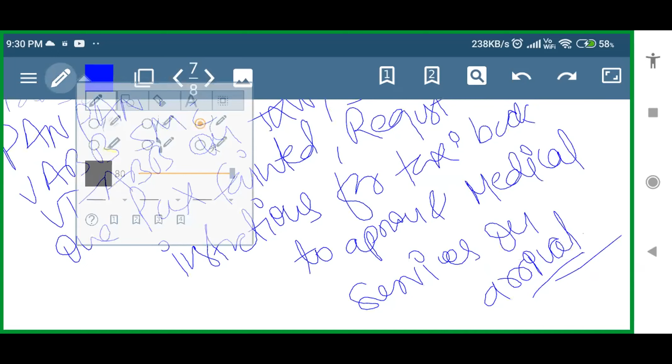Yes, sir. Don't hesitate to end with your call sign. If in a call structure your call is bigger, you will get those situations in our later practices. If your calls are more than 10 or 12 paragraphs, once you have already said your call sign - correction, here is the call sign - even if you repeated it once, you don't need to be shy to repeat your call sign again at the end. This is not a negative marking if you repeat your call sign.

Here also you can say: request instructions to taxi back and medical services on arrival, Bravo.

Don't hesitate that it will be used 2 times. Does not really matter, what difference does it make? If it's used 2 times, so what? So don't hesitate to use the call sign at last. If your lengthy calls make you speak for 1, 2, or 3 minutes, you can end with your call sign anywhere. It happened while I was practicing and learning those things - I also used to think, 'do I really need to repeat the call sign like this?' You can, no problem. I was the person who was feeling shy to repeat that call sign at end. That's why I thought I should tell you - no problem to repeat the call sign at end.

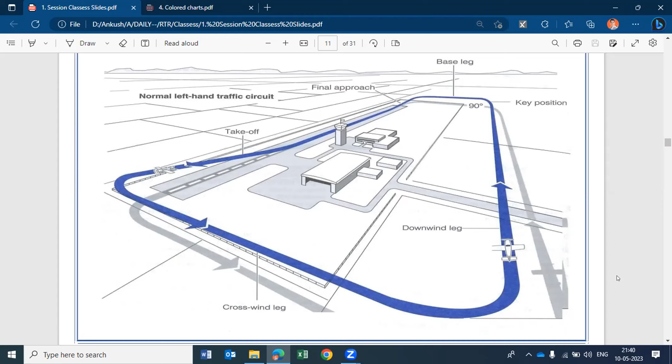Okay, like omission of 'go ahead' is also a similar kind of part. To make the call more professional, they had omitted 'go ahead', so that nobody will order you to go ahead. If someone is saying his call sign last, it means he has completed, now you can go ahead. Such kind of terminology, these are simple literature, philosophy things. So instead of air traffic controller, air traffic services is now in broad use in documents.

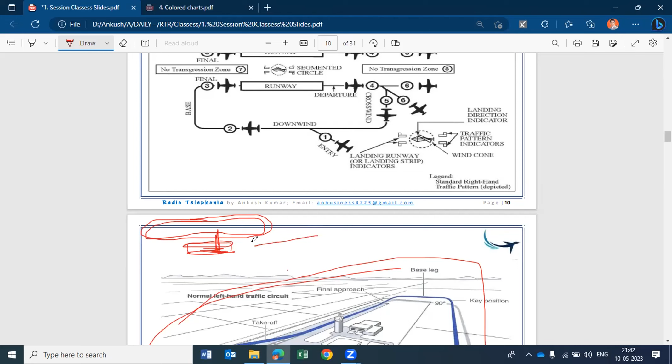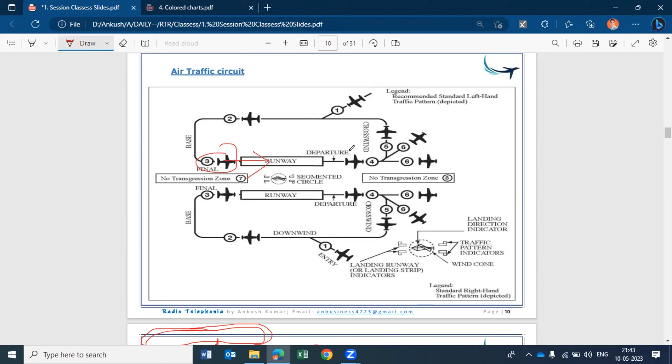I'll tell the definition of it at the end. First understand it with examples and figures. Air traffic circuit means an enclosed area or envelope over an airport to regulate or moderate its traffic. Suppose one aircraft came, two aircraft came - here only you can see this is the actual runway he needs. Suppose in this center only, here is our runway where the aircraft has to land. So many aircraft came at once, they will be told to go and circle around, like this. So they will make an envelope, an area just above the aerodrome so that they can.

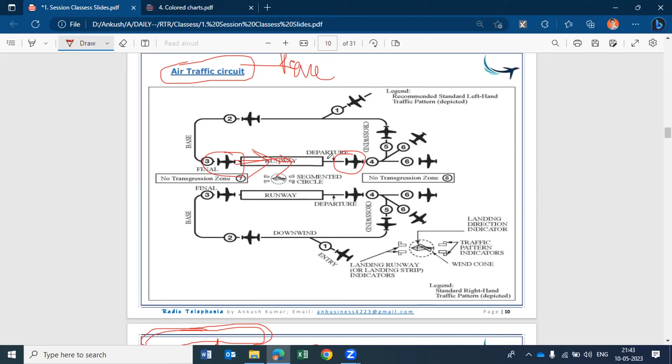Regulate only one aircraft to land on the runway and the rest of the aircraft will revolve around this circuit. This circuit means the closed envelope or closed loop. This is the circuit. Whose circuit is this? It's the air traffic circuit. What will it do? It will reduce the load of air traffic services. All aircraft cannot land at once, so they'll allow one aircraft at a time. The rest will be told to circle around the airport. Okay?

First use of the air traffic circuit, second use whenever you are following a VOR. It doesn't mean that they are going to align you with reference to a runway only, or that following a route means you'll directly land on that runway. For example, suppose you are following route Golf 450 and going to land directly at the runway, then what about these other routes?

Will aircraft take off using only this width? No, right? Yes or no? Let's make this session interactive. No sir, very good.

So if this route is such and my runway is this one, if I follow Golf 450 I will land on the runway. But what if I don't follow Golf 450? Do I have no right to land on the runway? Our runway is like this, if I follow Golf 450 I will directly land on the runway.

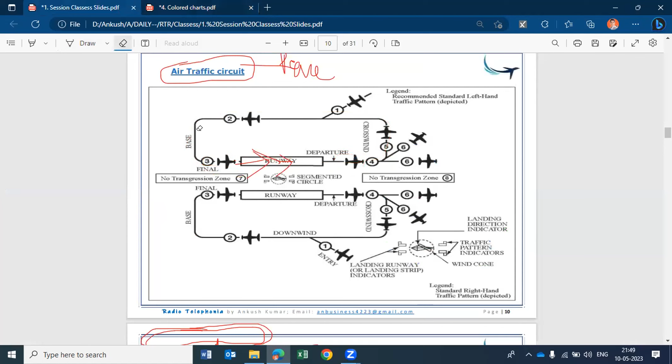Yes sir, now you can draw this figure. Shall I draw it roughly so it's easier for you? Do you want me to draw this with my hand on screen, or is this diagram good enough to understand? Yes sir, it is fine. Very good.

Sometimes students are like this, if they don't draw it themselves they won't understand. I had practiced drawing it myself, but this figure I had taken from Google. I don't know if there is a copyright issue or not. No, no copyright issue, okay.

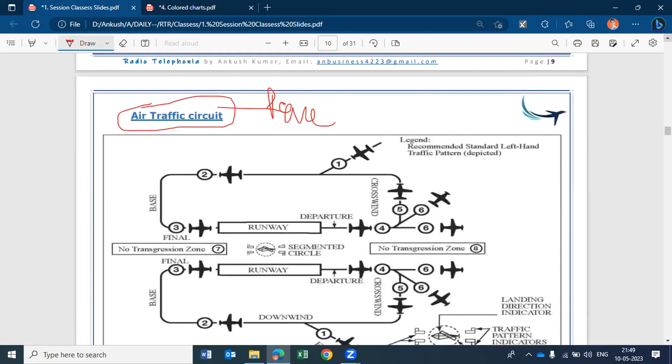So this is the actual traffic circuit, you understand how it is? This is above the ground, above the airport only. If you wish to see, this is the traffic circuit. See, there is some height, right? Not exactly on the ground, this is at some height. Is it clear? This blue colored line, this is an example of an air traffic circuit. Got it?

Yes sir, if the aircraft will come at here. For landing we need a final approach, it is written here right? Is this figure visible?

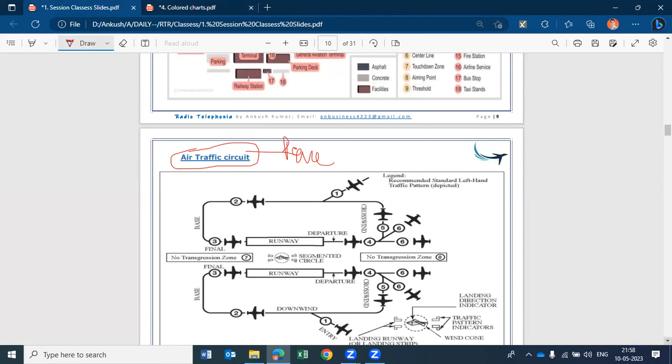There is a rule of right hand traffic and left hand traffic. Okay. So this image is about, this is the left hand ATC air traffic circuit. This is right hand ATC. Okay.

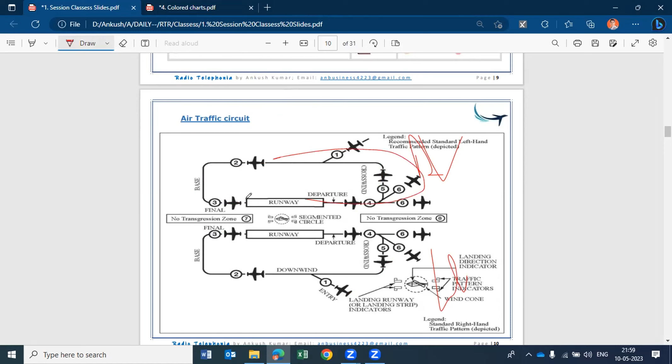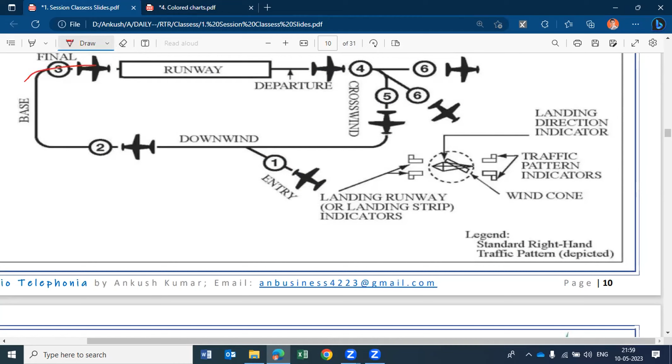As per the wind direction, it keeps on changing. Theek hai, do rule hota hai, left hand ATC ho sakta hai, right hand ATC ho sakta hai. Here also you can see this part. This is the right hand ATC. See, now any confusion?

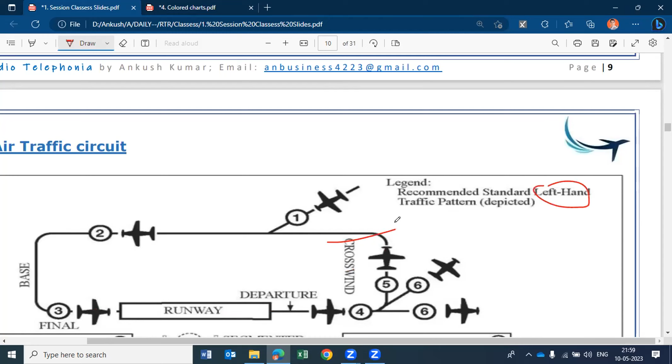No sir, I mean to ask, for a particular airport, does left hand and right hand remain fixed, or does it change as per the side the aircraft is coming from? Depends - this is the standard air traffic circuiting. It depends on the airport, which rule of ATC has been activated, left hand ATC or right hand ATC. At a time only one will remain active, but it can switch between both.

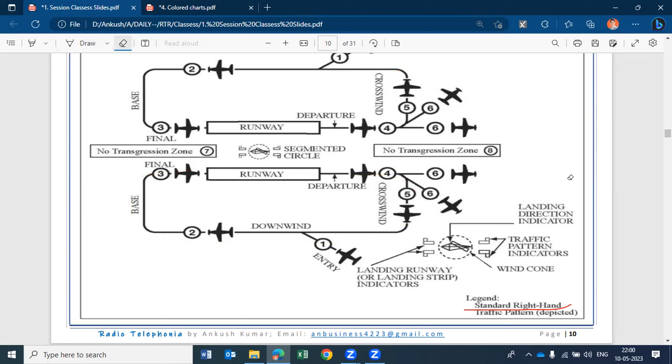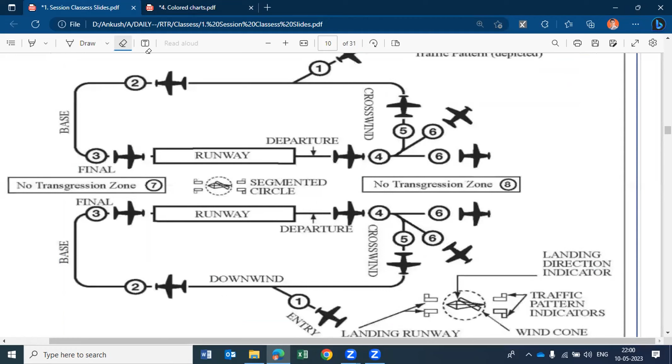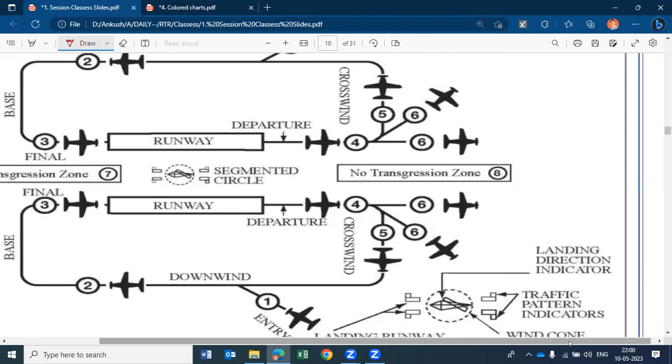Okay, so there are certain points on the air traffic circuit. Here you don't have all the names that should be under the air traffic circuit, but let me try writing some names for you. Let's start from here. Suppose these are figure numbers 1, 2, 3, 4, 5, 6, 7. The legends aren't given anywhere - what is 1, 2, and 3. I'll brief you using these numbers so you have a clear idea of a spot. Just take all these numbers as a spot, a point on the air traffic circuit.

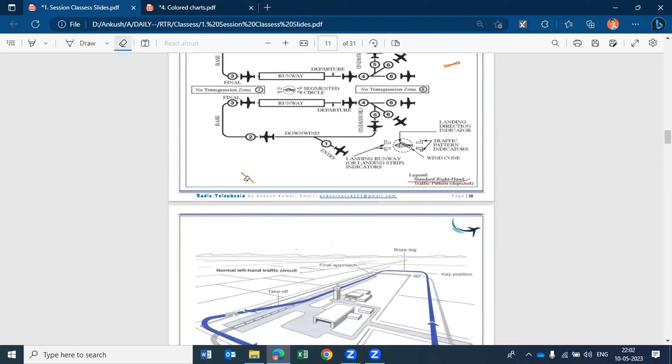Yes sir. So if this is a left hand ATC, the right hand ATC will similarly be a mirror image of that. So there are some spots on the ATC, names of those spots, so that you can identify what position you are in, in an air traffic circuit.

Suppose this is the landing aircraft - it's landing, and this one is taking off, taking off from this side. So this spot number 4, this fourth position, will be called the takeoff leg. Note it down - you can draw an image or directly reference this image. This spot number 4 will be called as takeoff leg.

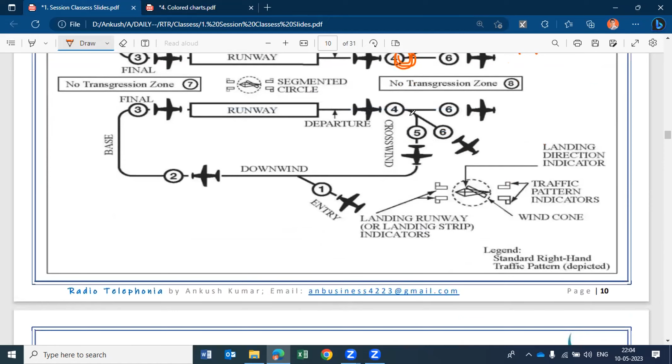Got it? Yes sir. Number 5. Number 5 will be known as crosswind, crosswind leg. You can use 'leg' after takeoff leg too. This spot number 5, not only this particular point but this whole region, completely this area, will be called your crosswind leg. Got it? Completely this area, crosswind leg.

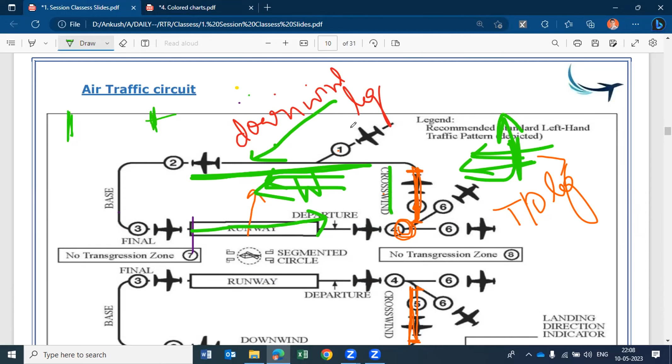Yes sir. Now, why has it been called crosswind, downwind or anything by name? Your takeoff is always in the direction opposite to the wind, right? So you can see if the wind is in this direction, this is downstreaming - stream, like flow of air or flow of fluid. This is downstreaming, that's why this edge has been called downwind. This is the cutting of a flow - if the flow is such and you are going to cut it with this takeoff, this edge will cut this flow, it is crossing this flow, that's why it is crosswind. Got it?

ठीक है? Yes, sir. इसको बोलते हैं बेस लेग, बेस, और इसको बोलते हैं फाइनल्स, ठीक है, फाइनल अप्रोच, दैट इज फाइनल्स, यू कैन से, नो प्रॉब्लम। फाइनल्स का एक डिस्टेंस का रेंज होता है, 8 नॉटिकल माइल्स पे फाइनल आ जाता है, ठीक है।

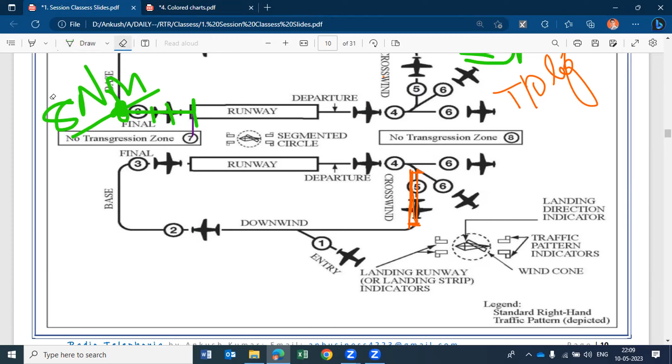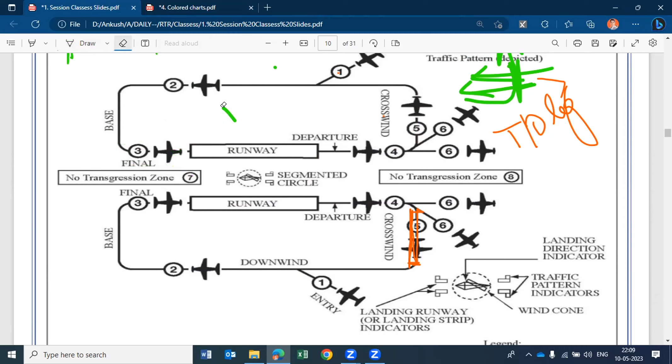फाइनल में भी 3 पोर्शंस होते हैं, यू विल कैच दैट लेटर, नॉट नाउ, यू विल गेट मच कंफ्यूज, विद द प्रैक्टिस ऑफ इट यू आर गोइंग टू गेट दैट। 8 नॉटिकल माइल से आपका फाइनल स्टार्ट होता है, 4 नॉटिकल माइल के बाद आपको डेफिनेटली रनवे सामने दिखना चाहिए विथ योर विजिबिलिटी एंड ऑल, ठीक है।

सो दीज आर द पोजीशंस इन एयर ट्रैफिक सर्किट। इज देयर एनी अदर थिंग? Is there any other thing in the left hand traffic circuit? Any confusion on any position? No, sir.

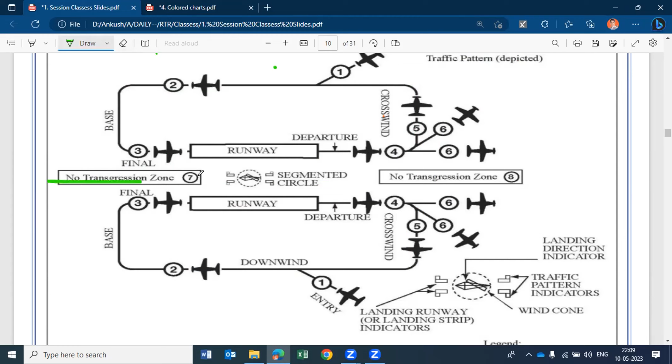Similarly in the right hand traffic also, this is the direction of takeoff. See, this is going to be a crosswind, downwind, base leg, finals. Understood?

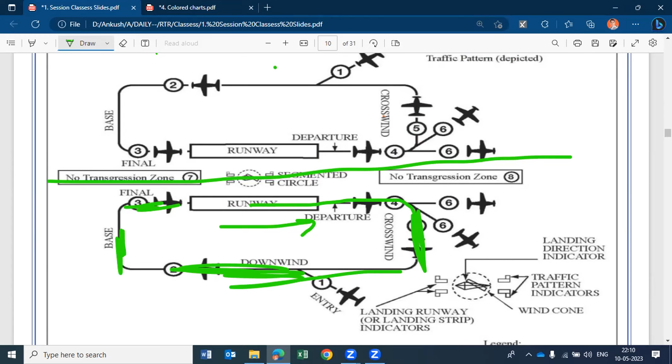Here you can see clearly, as I was saying, that you can enter at any point. This point number 1 is an entry point into an air traffic circuit. आप इधर से आओ, पूरा सर्किट फॉलो करो, लैंड कर जाओ, ठीक है, like this. And if you keep on circling, you will keep on going like this. Figure number 1, 2, 3, 4, 5.

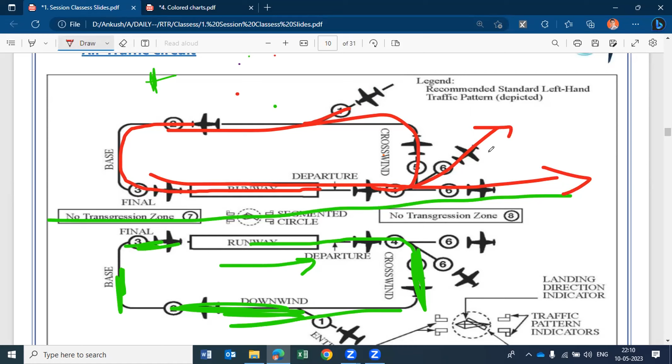आपका एयरक्राफ्ट आया, सर्किट फॉलो किया, लैंड किया, टच एंड गो में टेक ऑफ किया, अगेन जॉइन द सर्किट, और इफ यू हैव फर्दर फ्लाइट्स, कम एंड गो, टच एंड गो for your further flights, that it has been noted and you had set your course to the further flight. Understood? This is right hand circuit or left hand circuit.

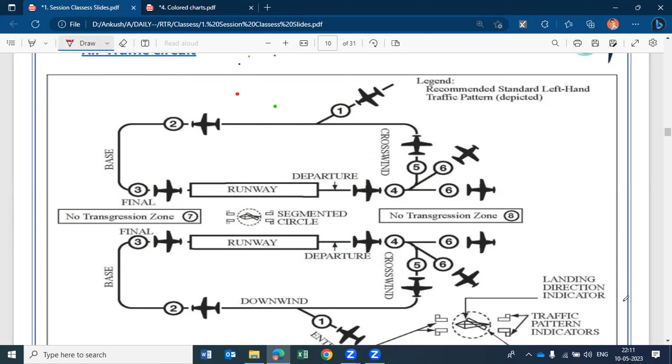Anything can be implemented, but only one will be activated at a time. ठीक है? Understood? Sometimes this right hand traffic and left hand traffic circuit both can be implemented on an airport, but only one ATC is for an aircraft. अगर दोनों भी implemented रहेगा ना, तो भी किसी एक एयरक्राफ्ट के लिए वो एक ही एटीसी रहेगा, राइट?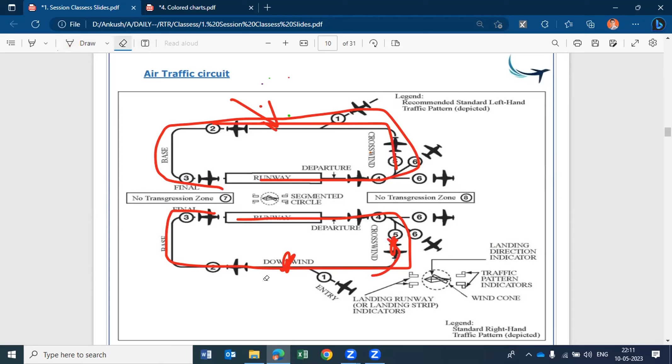और दोनों का पोजीशन सेम है, डिफरेंस बस ये है कि ये लेफ्ट हैंड से है, ये राइट हैंड से है। तो अगर दोनों एटीसी भी एक्टिवेटेड रहेगा ना, तो भी देयर इज मिनिमम पॉसिबिलिटी फॉर क्रैश और डेंसिटी ऑफ ट्रैफिक। ठीक है?

So this was the air traffic circuit. Any confusion till the time? Negative. Very good. Now, air traffic circuit is over. You are going to have some practice during practicing your calls and all.

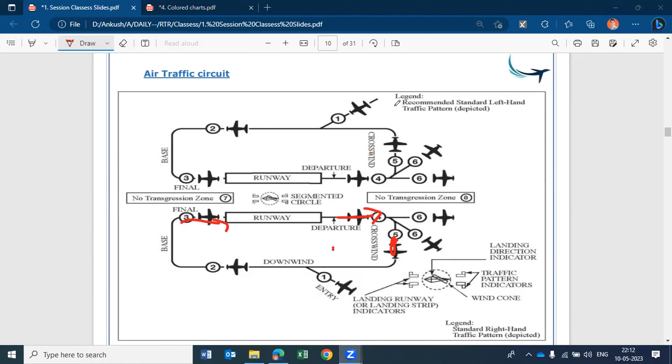Now, write some definitions related to the air traffic circuit. Okay. So air traffic circuit was completed. Have you understood clearly Victor Tango, Quebec, Foxtrot, Echo? Have you understood the complete theory behind air traffic circuit?

Very good. Okay. Abhishek, tell me what are the parts of air traffic circuit you had noted down in your note? Because I hadn't said. Sir: takeoff leg, then crosswind leg, then downwind leg, base leg, final leg, finals, then runway. Very good.

If this is a circuit, here it is runway. What about this? What about this edge? What about this edge? Just tell me that. Crosswind name. Crosswind leg. Okay. Crosswind leg.

इधर आपका टेक ऑफ लेग, Takeoff leg, इधर downwind leg, डाउनविंड लेग, और ये वाला एरिया पूरा फाइनल्स। ठीक है? इसमें भी आता है लॉन्ग फाइनल, शॉर्ट फाइनल, मिडिल फाइनल.